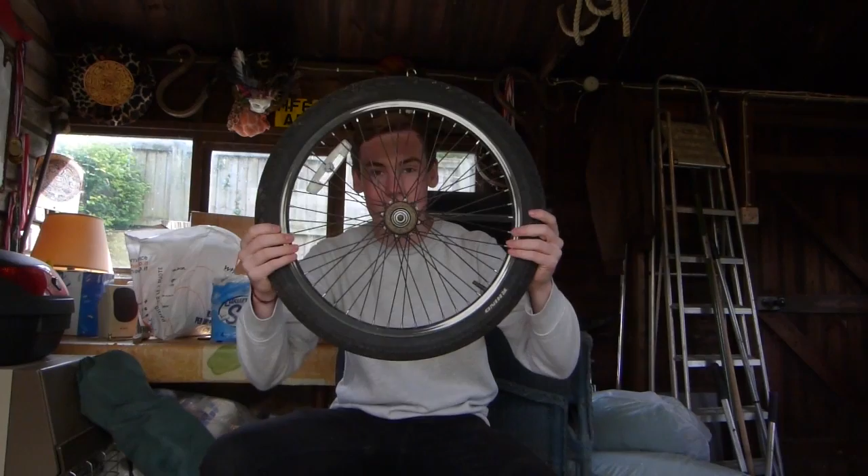This is a bicycle tyre and wheel, but more importantly, there is a flywheel device. What this means, if you don't know, is that the sprocket can spin one way freely, but not the other without turning the wheel. And it's going to be crucial in meaning that the drill doesn't always have to spin. Now there's a few complications with this, which I'm going to run through, but I will now show you the rough plan with the bikes and some drawings.

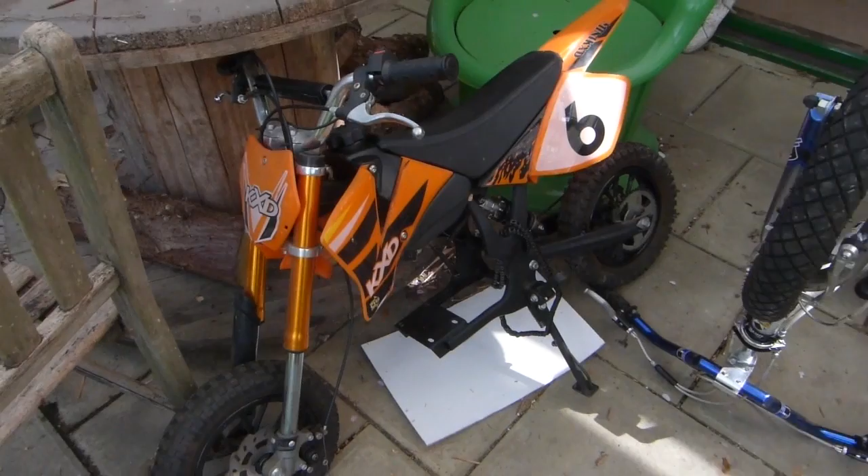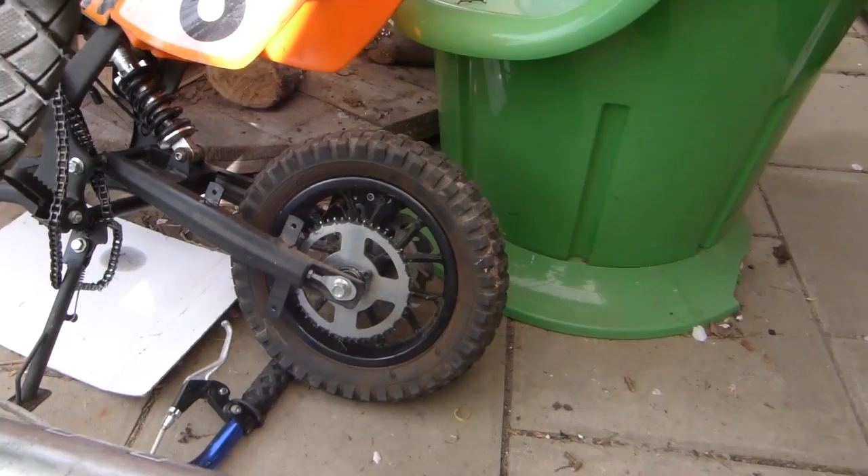Okay, so here we have the mini bike, and here we have the bicycle that we're sort of dismantling. The issue is that the sprocket on the flywheel matches this chain from the bicycle, funnily enough. It does not match up with the sprocket size that is already on the mini bike wheel, which means we're going to have to do a full sprocket swap over.

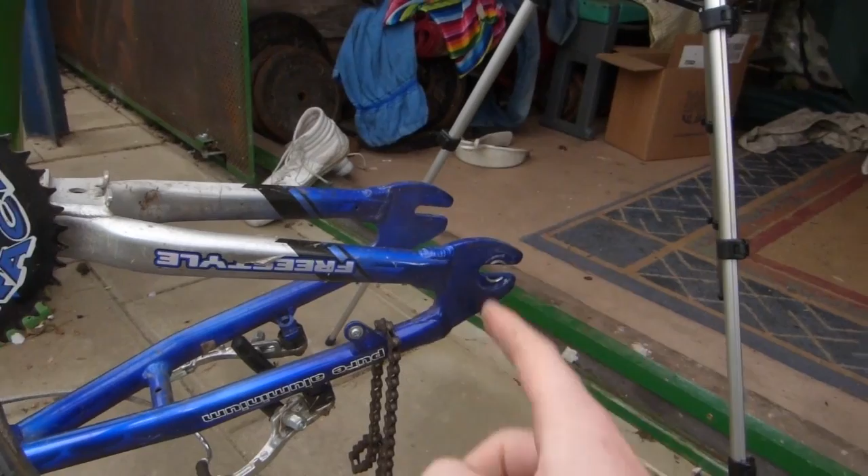To increase the low down power of the drill so we can get moving, the front sprocket on the bicycle I'm going to use as the back sprocket of the mini bike, and the back sprocket of the bicycle I'm going to use as the front sprocket of the mini bike.

So some more information about the flywheel mechanism. As you can see, it spins one way and doesn't spin the other. Now this axle in the middle spins completely independently of the whole mechanism, which for us is an issue because we're going to attach this bit of the wheel like it's a drill attachment, so the drill will just screw onto this.

That means that when we spin this, we need the wheel to spin, which is why on this side we need to weld these two bits together all the way around, so that when this spins, the whole wheel actually spins instead. Hopefully Dad can manage to weld this without too much trouble, but we'll see how that goes. I need to take out all the spokes and sort that out.

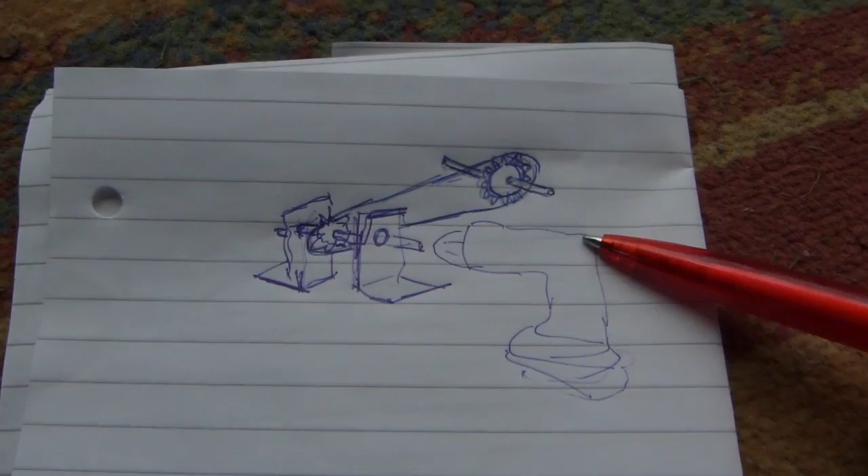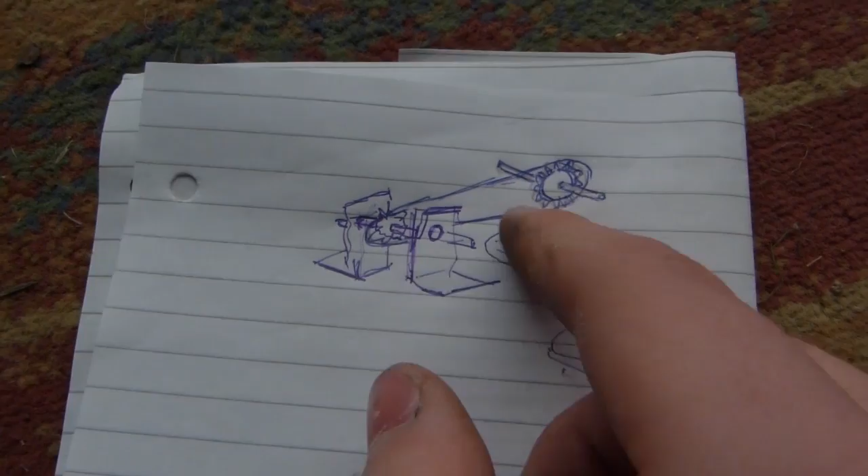And now if we have a quick look at the diagram, this is meant to be a drill, not a bent over sexual object. Here is the back axle, which is currently the front sprocket of the bicycle, and here is the flywheel device, which will be welded up. It's going to be held at both sides, much like the back wheel is by the swing arm, but the front will be held on with two brackets.

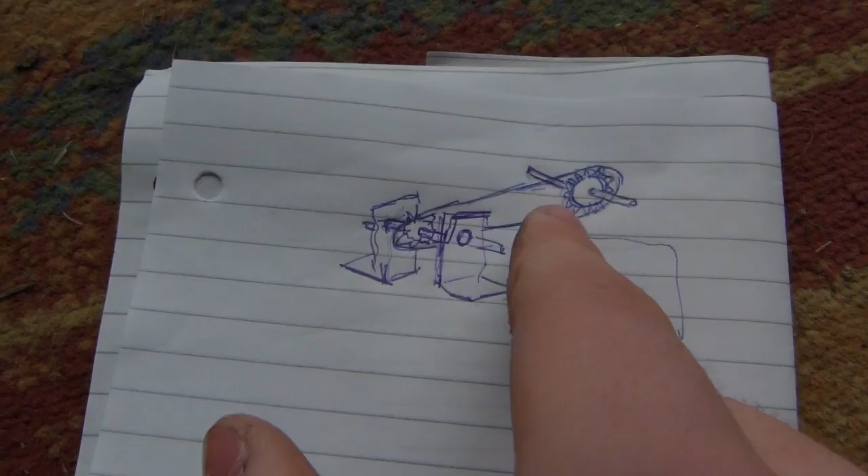The drill will be clamped on, which means when we spin the drill, it will force the sprocket to go round and power the back wheel, but once the drill stops, the flywheel will kick in and let the bike carry on rolling without the drill moving. Okay, a fantastic plan,

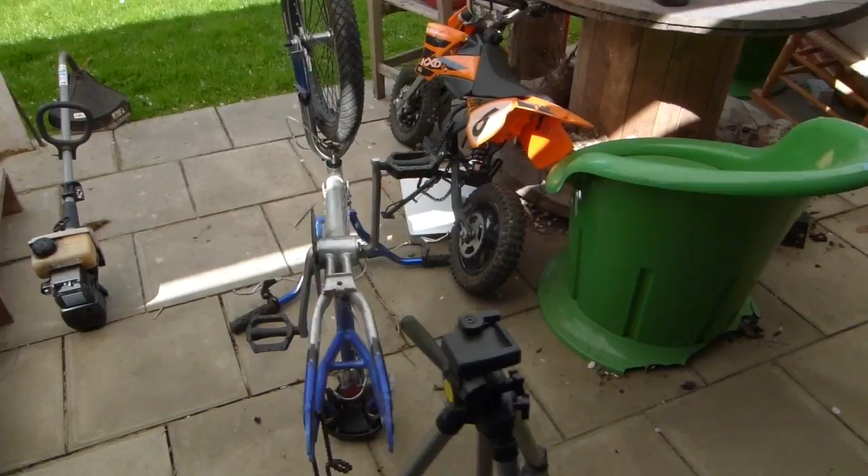but will it work? First jobs are to take the back wheel off the pit bike, mini bike, the sprocket off the bicycle, and take this centre flywheel off of the bicycle wheel. Okay, so I have the mini bike propped up on a bit of a bucket, so the back wheel is free to spin, ready to take off the back wheel, which I'll do slightly later.

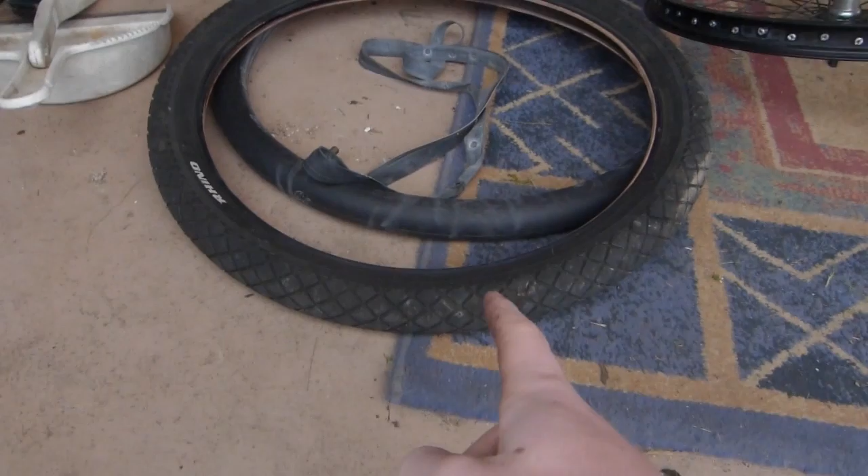The next thing I've done is I've taken the tyre off of the wheel, I've taken off the inner tube, and there's this sort of rubber band that goes around the wheel to protect the inner tube from the spokes. So I've removed one spoke. It's going to be a bit of a long job, I think.

Okay, so here we have a spoke. On these spokes you have this hook bit which will hook into the centre flywheel hub. The other end of the spoke is threaded here with this really small thread and this little cap. So the spoke threads through the wheel, and this little cap is placed on the other side of the wheel, so you can imagine that the wheel would be in between these two like this.

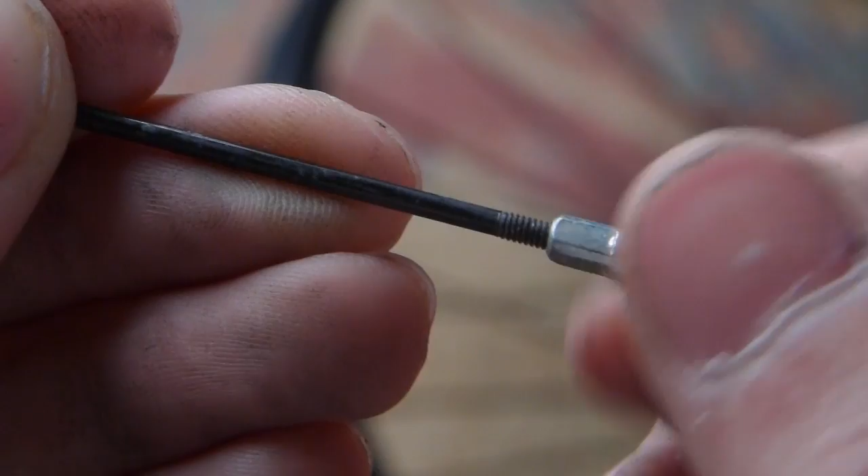To tighten the spoke, you then tighten these caps, which will pull the spokes further and further away from the centre hub. Okay, so now I've got to do the rest of the ones all around the hub, which is going to take a little while. I think I'll have to do them sort of diagonally or something, not just straight the way around, otherwise it will mess it up.

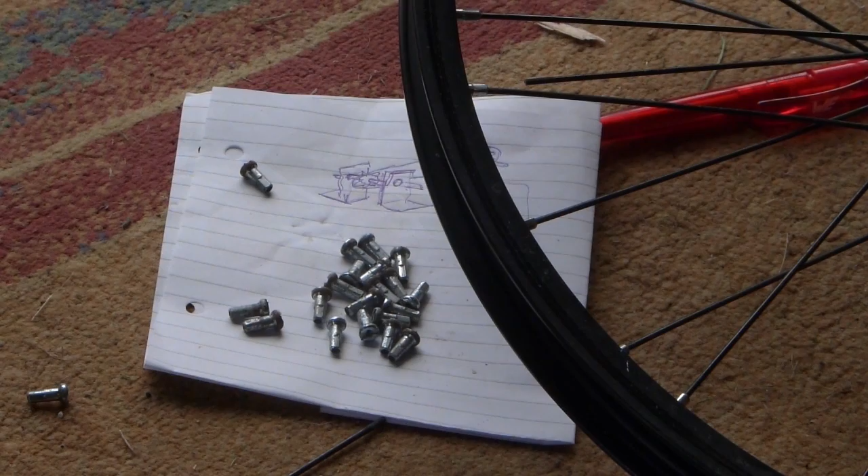So as you can see, there's a few spokes on the floor. A pile over there, there's a whole bunch of the caps. There's my little pile of all the caps. However, the spokes are getting really hard to take out. The ones that were easier to take out have gone. So I've got a new way of removing the spokes.

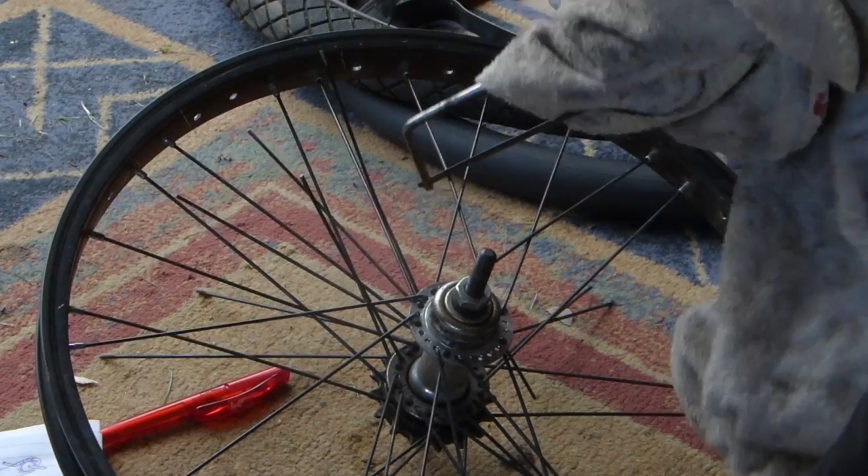I do not endorse this way of crappy workmanship in the slightest, but it's a bloody great way to get it done, I tell you that. Keep your distance, shut your eyes, protect your hand. Woo! The caps on the end are literally stiffer than a pedo in a nursery, so every time I try and undo them, the thread disappears. This way's much more fun anyway.

Okay, so the middle's been taken out, and I'm left with kind of the flywheel, but a bunch of the spokes I can't get off due to the cog being in the way. So what I'm going to do is undo the bolt here, and hopefully that will mean I can remove these spokes easily. Many apologies for that horrendous lighting I managed to achieve in that last clip.

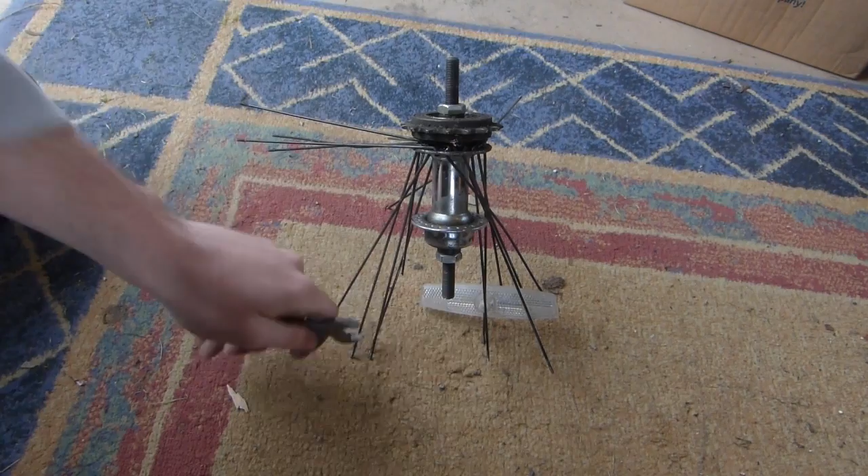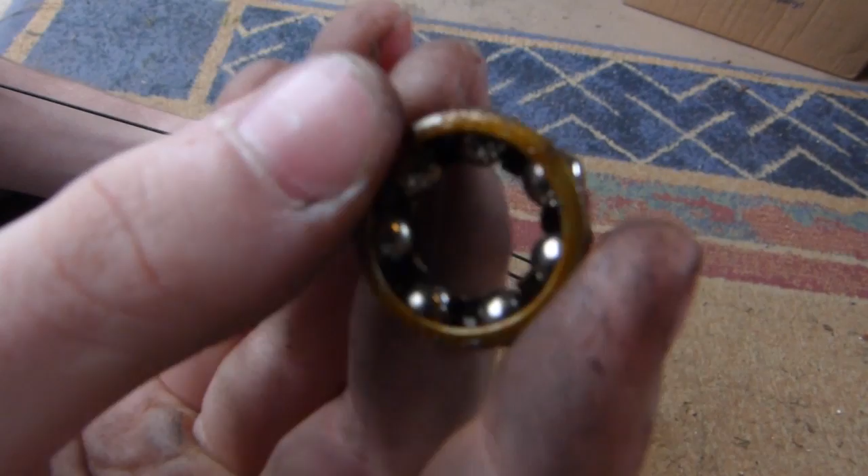These spokes are really getting in the way, being an absolute nuisance. There we go. Okay, so hopefully once I've undone this, the cog should just slip off. The chances of that being as easy as that are pretty slim. Here's the ball bearing inside. That's pretty damn cool. Okay, that doesn't look like it's done what I wanted it to do. Who on earth designed this? I'm sure there's a simple way to get these out, but I don't know what it is.

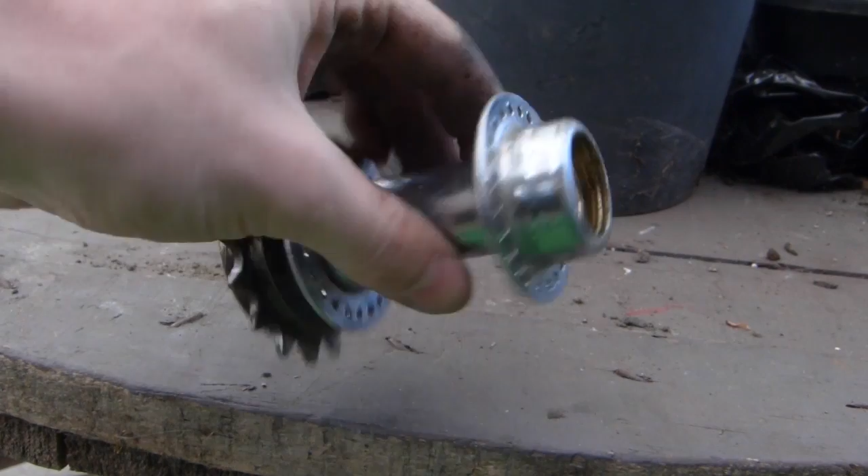Okay, so we have the freewheel mechanism. I managed to get all the spokes off this end by bending them, which was extremely difficult. So all the spokes have ended up looking like this, where I've had to bend them round the bottom to get them out. I couldn't find any other way. I'm sure there was a better way, but it's done now.

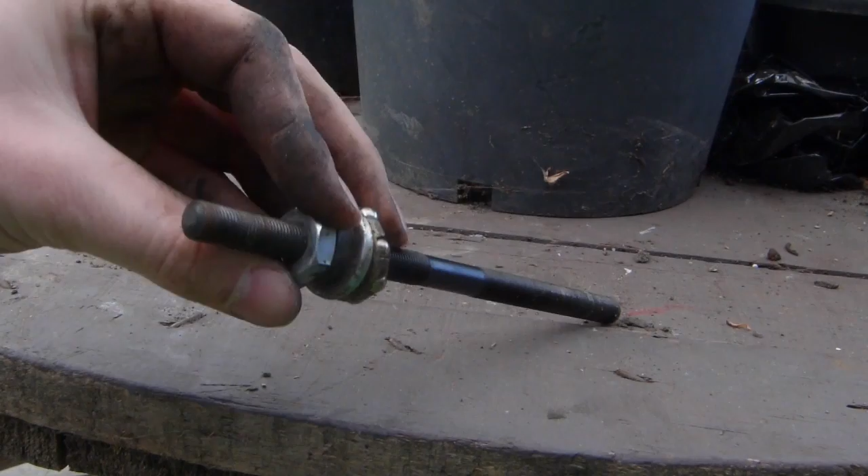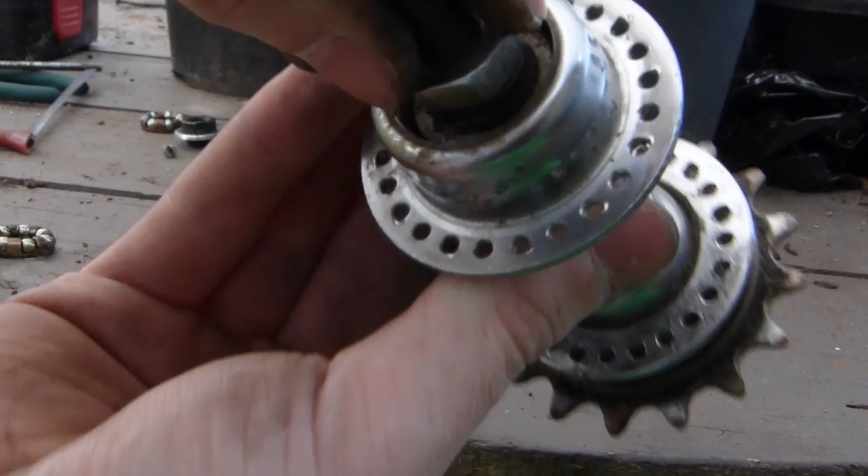One job now is to secure this middle post, which will be connected to the drill, to the main hub, and then only having the sprocket go around on its own. So I need to secure this silver hub to the bolt type thing. As you can see, this is hollow, and the axle sort of goes through it. So what I'm probably going to try and do is put 2-part resin all in here and down the tube, so then when it's set they'll be joined together.

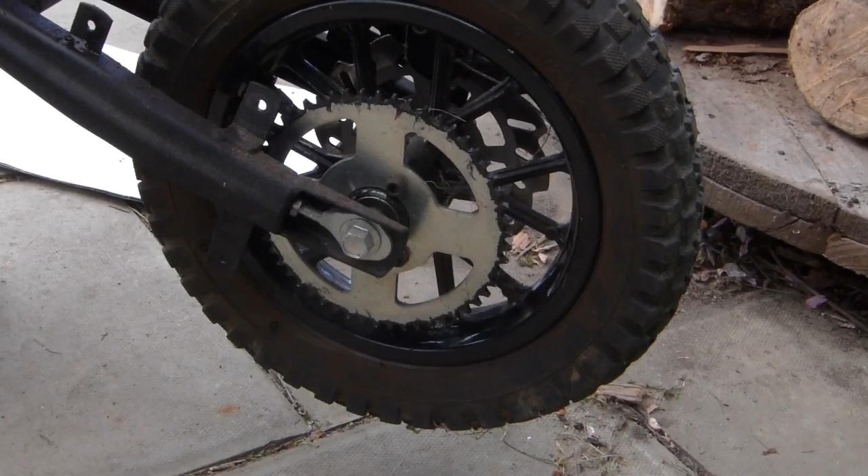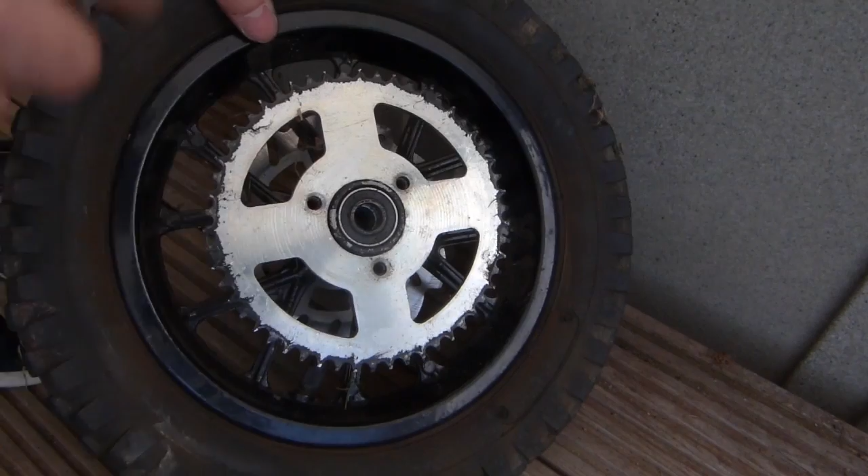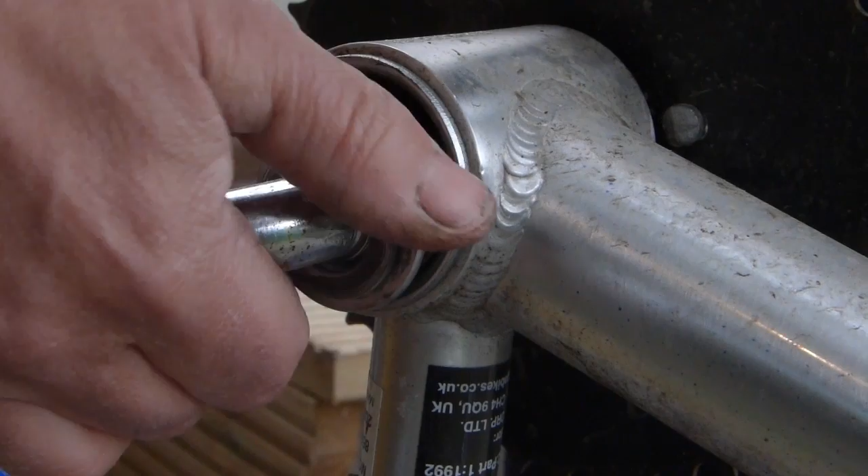Next job will be to take this mini wheel off. It's barely even done up. Done. Oh. I'm not sure if this is doing what I want it to do, but it appears I can undo something or another, like so. Okay, well, something came off. Dad has made progress. Reverse thread. Reverse thread, the famous. Oh, there's a big bearing in there as well. Nice one. Completely covering up the shot. There we go. Removed.

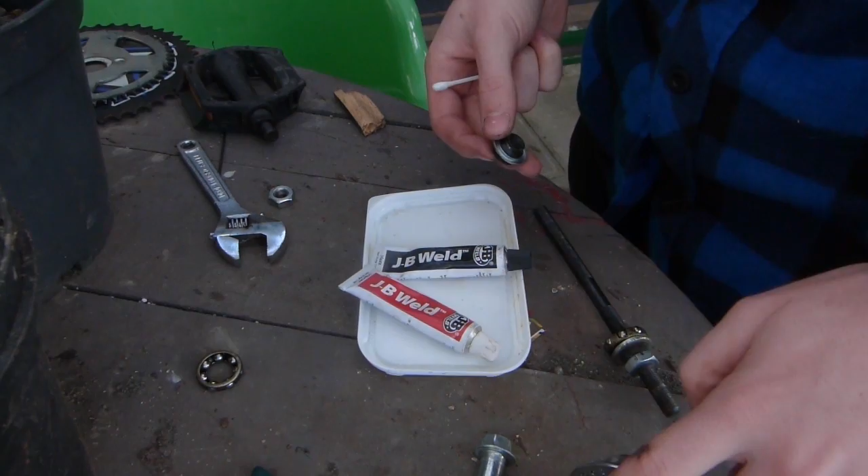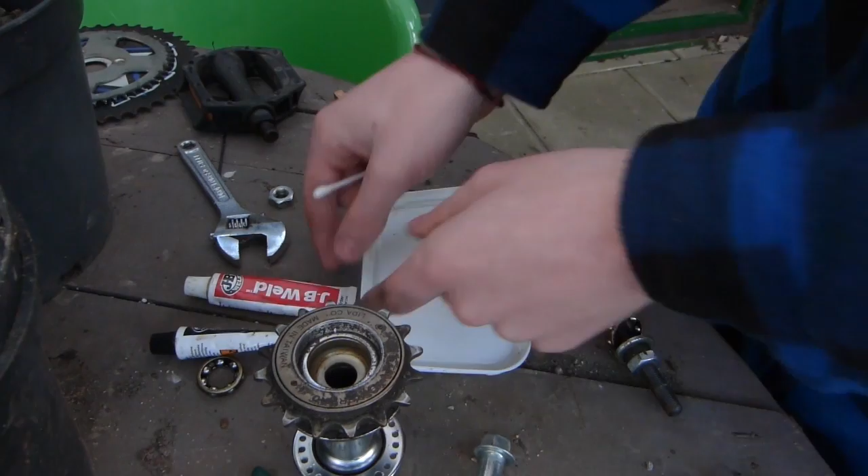Okay, so after looking at parts of the hub and axle for the freewheel, I realised that welding is going to be pretty difficult because the metal I was going to weld is really thin. So what I've got is JB Weld. What I'm going to do is just mix up this resin, layer the inside and the bearings up with it, and tie it all together and hope that it's strong enough to spin the hub when I spin the axle.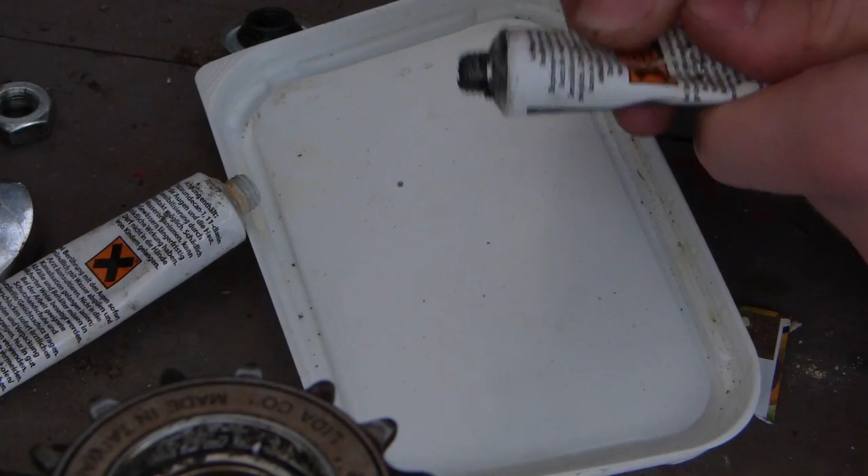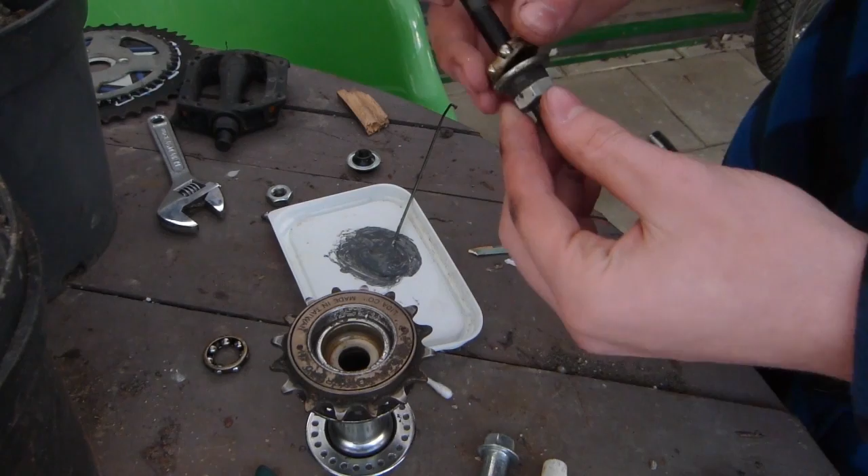Bit of splurge. We have a blockage. Now for some of the white splurge. Oh, so much smoother. I'm also using a spoke as a mixer. Okay, now we have our JB Weld mix. I'm gonna lather up every crevasse and hopefully make it stick.

The point of no return. RIP to the ball bearing. He has been cemented. The money shot. This shot's worth a lot of money in the biz. Time for the insertion.

I've got high hopes for this. I can already feel it getting into work. I'm going to leave this overnight, and hopefully by the morning we're going to have the freewheel of my dreams.

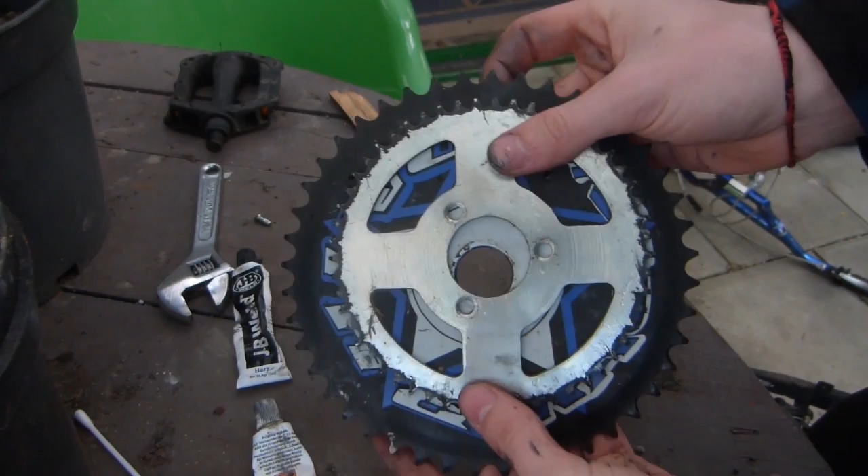So one more thing is, I've got the original sprocket from the mini bike and the BMX sprocket. Another job is to line this up correctly. I'm going to make sure to make this extremely accurate. Drill holes into the BMX sprocket and also widen the hole of the BMX sprocket so it's the same size as the one from the pit bike. And then I'll be able to attach this sprocket onto the wheel.

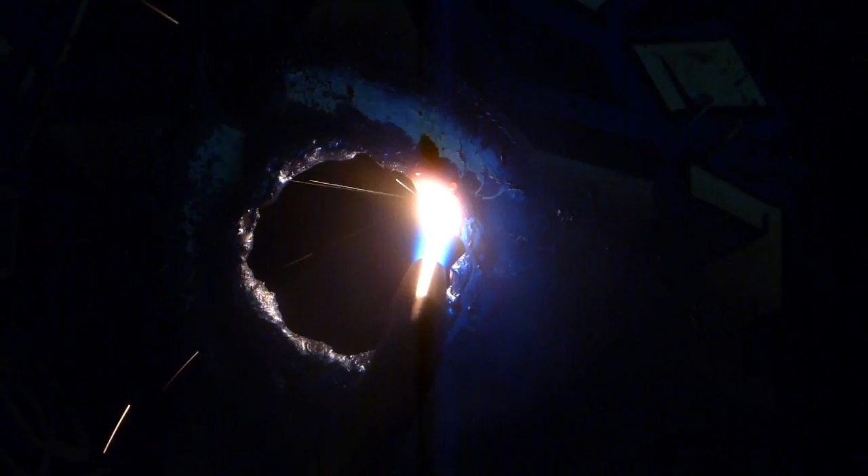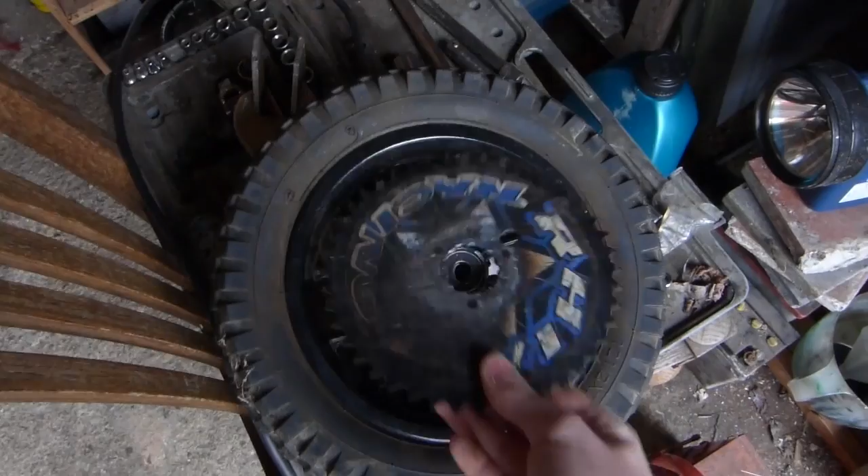Okay, so what I've done, using the old sprocket, I've measured the distance from the outside and marked these 3 holes, which are where the bolts will go in. There's some bits of metal that are still in the way, so I've highlighted those with highlighter, so I need to file them off now. And once that's done, this should fit onto the wheel. Should fit on there. And these 3 bolts should all line up with these 3.

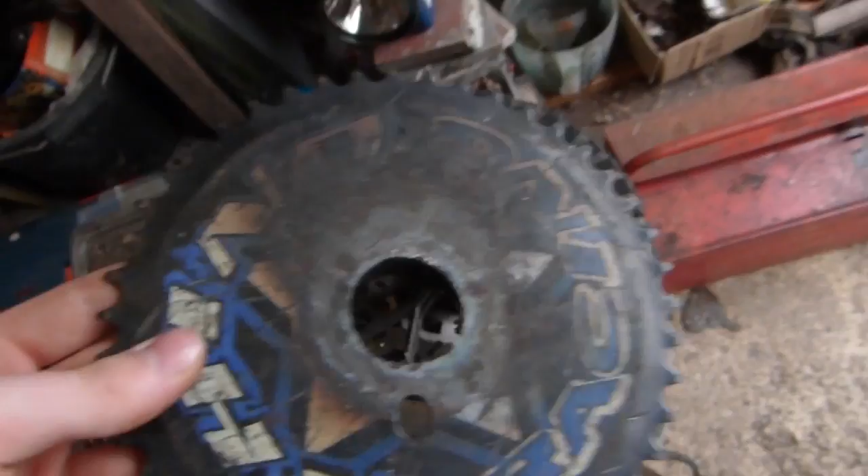Okay, so I've filed the sprocket hole down, kind of neatened it up a bit, and hopefully it should now fit on the wheel. There we go. Pretty nice fit actually. It's a little bit off, but it's kind of to be expected considering we burnt through it. So now we have a huge sprocket on the wheel, ready for the chain. Time to drill through for the bolts that will go through into the wheel. 1 down, 2 to go.

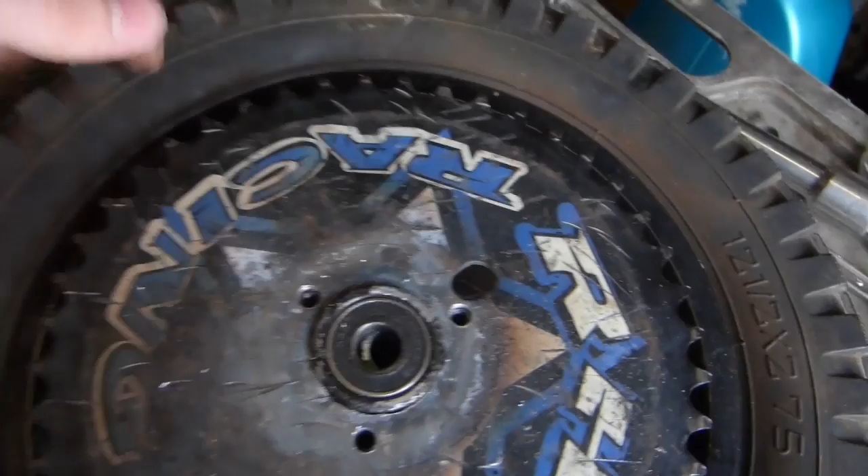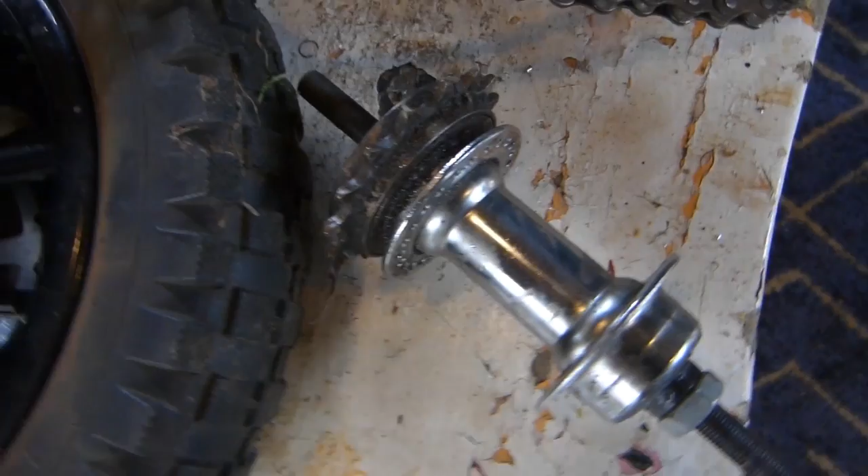Okay, it is extremely likely that these holes will not line up perfectly. They look pretty good to me. I'll try to put the bolts in, but I might have to file them down a bit. We have the huge stunt sprocket looking thing on this. We have the chain. I put like the most ghetto split link you've ever seen, which hopefully will hold out just for this test. And then the freewheel is there.

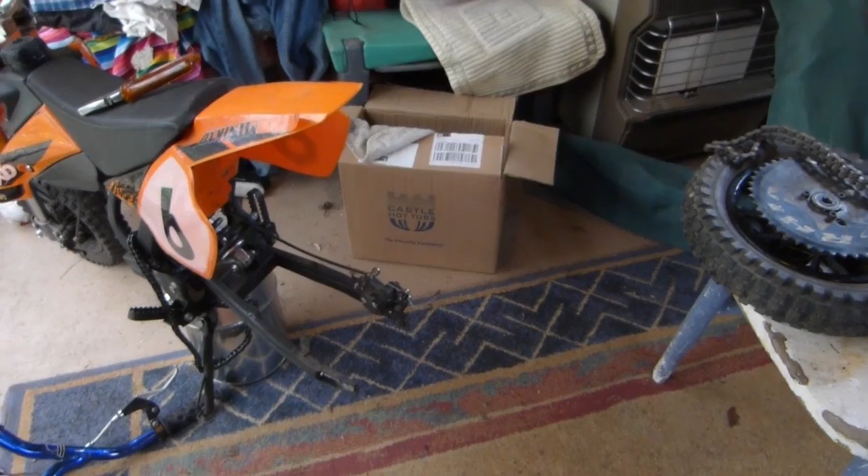What I'm going to try now, just as a proof of concept, is put the back wheel on the bike and hold the drill and use this to spin the back wheel. And then next video we'll have a moving bike. So we've got to remember, this is a complete proof of concept. The chain won't be tight enough, it's not angled correctly, but the back wheel should spin, this should spin, and when I release the button on the drill, the wheel should be able to carry on spinning whilst the drill has stopped.

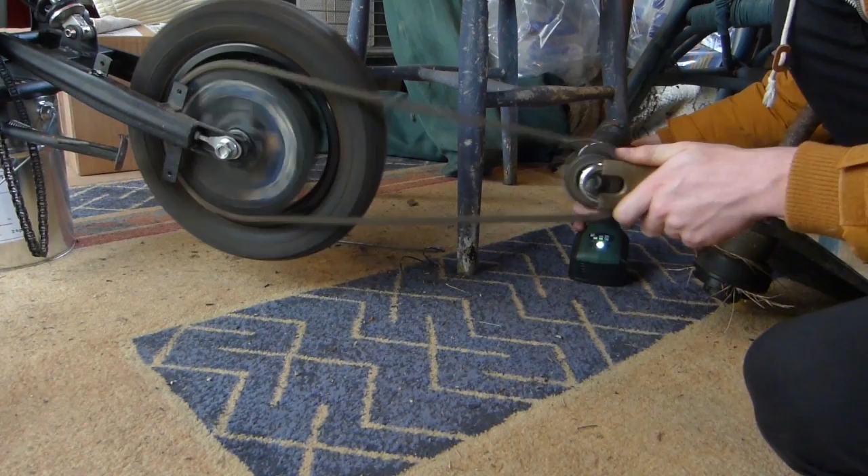Let's hope. Okay, so I've got to try and position this as best as possible. It's probably going to skip off. I'll try and get it as close as possible. Okay, I can feel the chain skipping. Woohoo! Yes! That is mental. Okay. As you can see, when I let off the power, the wheel carries on spinning. Now, I don't know how much power's in that wheel. Woo-hoo-hoo! Okay, well.

So I don't know how much power's in that wheel. I don't know if it's going to be enough to move me, but it looks pretty good, and I reckon one way or another we're going to get this thing to move. Now, there is some bad news. It's currently the last day before I go back to uni, and when I'm back at uni, I can't work on this. I don't get back for another 2 months. So there's going to be a bit of a wait until I can see if this actually works as fully intended. But the proof is there. What we've done so far has worked fully to the highest extent. I'm excited. I think it will work.